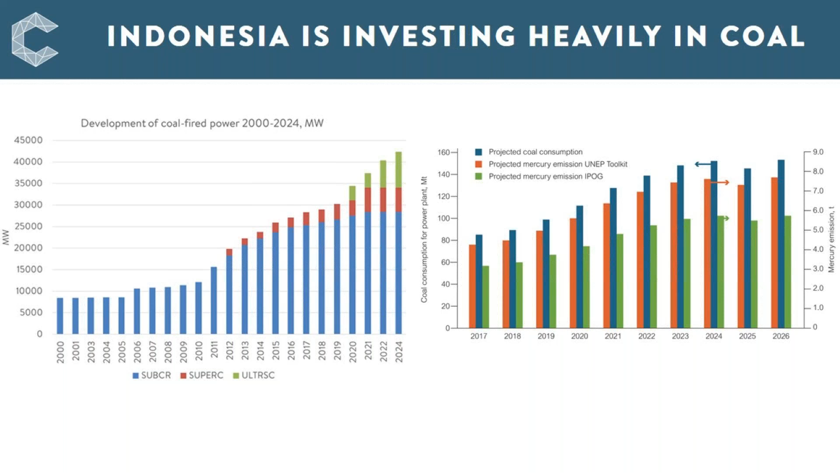Now, Indonesia has ratified the Minamata Convention. The Minamata Convention is set up by the United Nations to control and, where feasible, reduce emissions of mercury from all human activities. And coal is one of the major sources of mercury emissions to the atmosphere. Mercury causes developmental delay in infants and at high doses in adults too. It generally comes through eating fish and through the food chain. And so the accumulation of mercury in the environment is of great concern to most of the nations.

Indonesia, as I say, has ratified the Convention on Mercury, which requires it to take two actions with respect to emissions from the coal sector. First, on the left there, it must create and maintain a sectoral emission inventory, which means it must evaluate how much mercury is coming out of its coal sector and must keep an eye on how much that increases or decreases into the future.

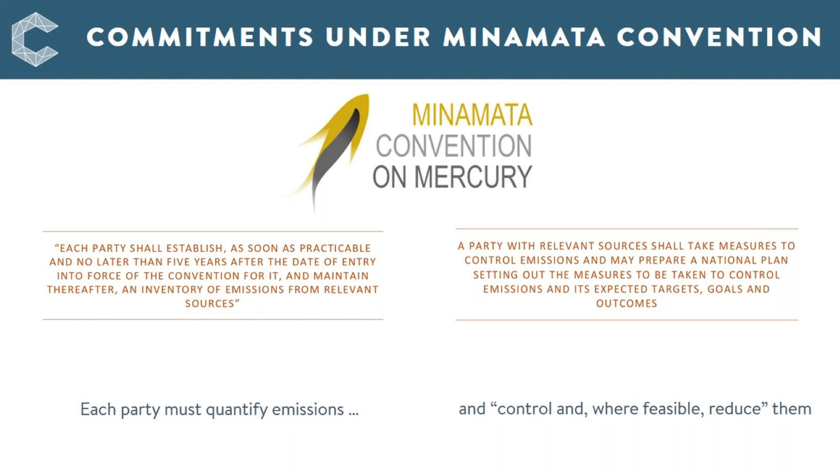And on the right there, it must take action to control and, where feasible, reduce mercury emissions by creating a national action plan that will focus on emissions from the sector. And that is what this project is about, helping Indonesia evaluate the mercury emissions and determining a national action plan to reduce those emissions.

Now, the Minamata Convention contains clear guidelines on how compliance should be achieved with different mercury emission sources. Within Article 8, there are requirements for actions specifically at coal plants, and the plants are divided by age, determined by the date in which the relevant party ratified the convention.

And that BEP is described, as I say, in this document, but it's not prescribed. The delegations themselves must determine what emission reduction techniques and technologies are most appropriate to their plants, and cost can be taken into account when considering what is best in each region.

Now, for Indonesia, as we saw in the previous slide, the majority of new plants being installed are HELE technologies, these high efficiency and low emissions. There are also more stringent emission limits for SOx and NOx in new plants. This means that most, if not all, of the new plants being built these days are going to have SOx and NOx control technologies in place. And these will result in co-benefit reduction of mercury in many cases.

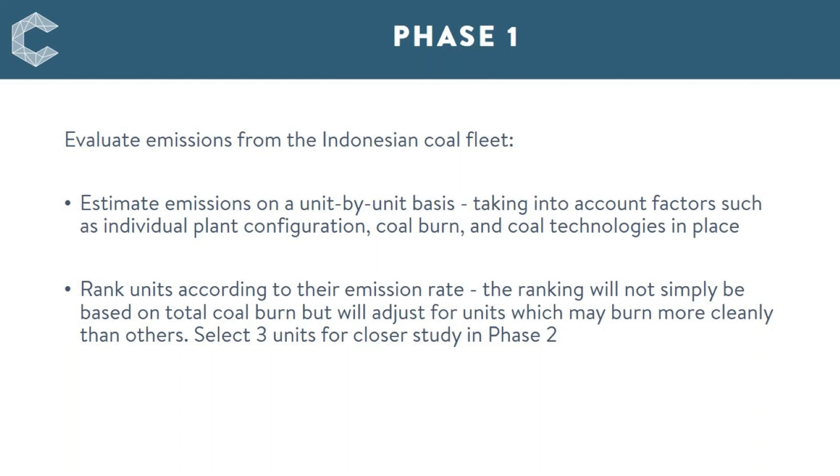So phase 1 is to evaluate emissions from the Indonesian fleet. For this, we have looked at over 111 units of plants over 100 megawatt in size. I think there are actually over 200 units in Indonesia, but only about 100 or so of those are over 100 megawatts. This means collating information of all those plants to crunch through the numbers to estimate mercury emissions for each individual unit. The ultimate aim is to then rank the plants in order to identify which plants emit the most mercury, as these plants would clearly be the most appropriate for the application of an emission reduction strategy under the National Action Plan. So in practice, we're creating the basis of an emission inventory, and from this we hope to develop a potential national action plan.

So first of all, the data collection, a lot of numbers collected in an extremely large data set. We, as I say, focused on the units over 100 megawatt in size, although the other smaller plants are listed in this data set, and that includes over 100 units.

We are focusing on the larger units as they are the plants that are more likely to be larger capacity, a larger utilisation rate, and therefore more likely to be contributing to the mercury emissions for the region. And also the larger plants are the ones where cost-effective emission strategies are more likely to be successful.

So we collected as much information as we could, COVID willing. We started this in January and it ran until July. The data set is huge. We have over 70 fields of information for each of the units, including the major factors listed here in this graph. We had actual coal chemistry for the coals and the coal blends being used at most of the plants.

As we gathered this information for a study we carried out in conjunction with the US Geological Survey on behalf of the UN Environment Programme in a project we did back in 2017. And we updated as much of that information as we could.

For the coal, we had obviously the calorific value, the ash value and so on, but we also had the mercury, sulfur and chlorine content, which affects the chemistry and the behaviour of mercury in the plant and is very important with determining how much leaves the stack and how much ends up in the ash.

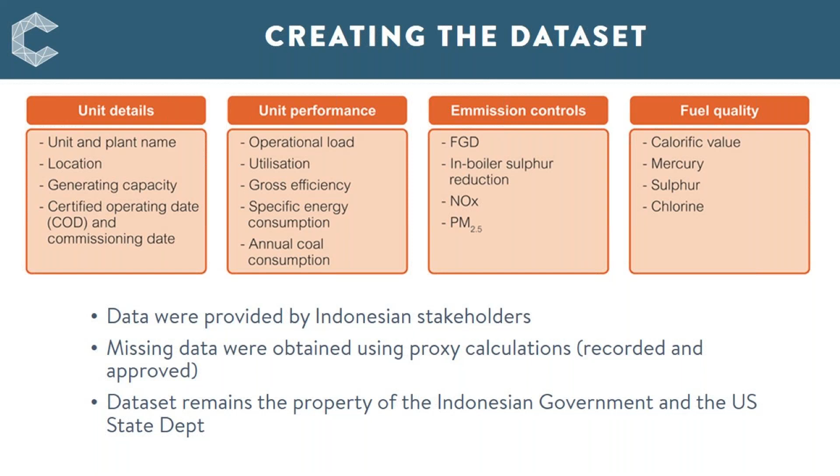The data set, as I say, is huge. We're not going to be sharing it. It is proprietary, some of the information, and it remains the property of the Indonesian government and the US Department of State. However, as we move into phase 2 and 3 of this project, if anyone specifically needs more information on the plants we are studying, we will hopefully get permission to release more information as it becomes necessary.

Okay, so moving on to data analysis. It's important to understand the major differences between this study and most other sectoral emission studies. The majority of emission inventories you will see out there are top-down.

That means you're taking an emission factor for a general national coal in most cases, combining it with a retention factor that's a reflection of how much mercury is retained within the ash or the gypsum from the plant and doesn't come out of the stack, and then using an activity value such as the total amount of coal burned to produce an estimate of mercury emissions from the whole fleet. And this is the way the UNEP toolkit defines how to do it under the Minamata Convention.

It provides a generic emission factor, a table of those, and if you look up that table, this is the emission factor you will get for Indonesia. It provides a generic retention factor based on ESP only on most of the plants. And then of course you multiply that by the amount of coal burned in Indonesia, and that gives you your mercury emissions from the fleet.

In 2017, we carried out a project, as I say, on behalf of the UN Environment Programme, in which we went in and we analysed the coal so that we got an emission factor that was more accurate for the Indonesian fleet. We also used our IPOG model, which I'll talk about in a minute, to predict a more accurate retention factor for the mercury within the plant.

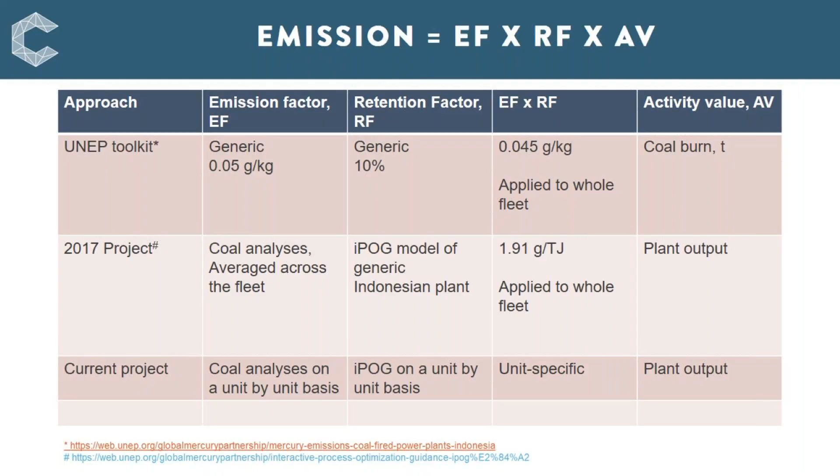Now, this is the IPOG calculation tool, which I have mentioned in the past. There is a webinar on this available through our website and through the Global Mercury Partnership website of the UN Environment Programme, and I can send you that link. Oh no, it's actually down the bottom there.

If you go to that site, you can download this little Excel tool. Your computer won't like it. It is an exe file, so beware, but I can promise you, once you've downloaded it, it is very useful. It comes with a very important user manual so that you understand what data is being used and how best to use it.

And what this is, is a very user-friendly interface which lets you type in your coal chemistry as much as you know. If you have a lot of detail, you can put that in specifically. If not, you can choose a generic high sulfur coal. You put in, it's almost like a Lego brick build, an indication of your plant configuration.

So you'll choose the boiler size and configuration. You can put in low NOx burners or not. You can choose an ESP or a baghouse. An FGD can be slotted in there. It takes less than 3 minutes for most plants to put this information in. You press the go button, and in the top right there, it will give you an estimate of mercury emissions from your plant. Obviously, it's science, it's not magic.

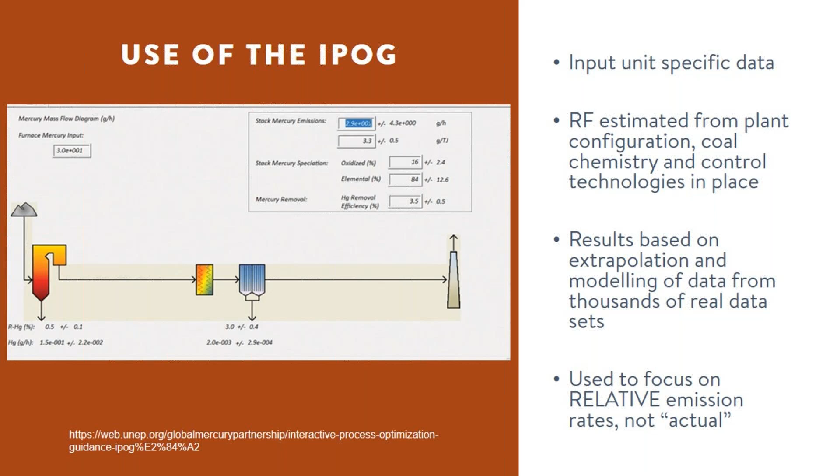It's based on data collected through the information collection request of the US EPA several years ago, and it's been augmented with data that we've collected from Asia, Africa, and Russia. So there's a lot of numbers behind there, over 3,000 mass balances from actual plants. However, obviously, it still remains a best guess, and we would not recommend that this is used for defining the control strategy or the emissions from any plant. However, it's a very useful tool when you don't have any access to the plant in question.

Okay, so we number crunched. We have the coal characteristics from the study we did with the USGS. So we have the coal emission factor specifically for each unit. We have a plant-specific retention factor that we've estimated using the IPOG tool, and of course we have the plant utilization rate that we got from the Indonesian stakeholders, how much it's running, how much power it's producing, and so on. And so there are two ways of ranking the information we get from that.

We can look at current emissions, which are interesting, but they provide a very uninformed snapshot. Plant A and Plant B may be emitting the same amount of mercury per year, but if Plant A is going to close in 2 years and Plant B is going to run for another 30, then obviously Plant B is more significant with respect to any reduction strategy. What is more useful is the emission intensity. That's the amount of mercury emitted per gigawatt hour of electricity produced. And that's going to identify which plants are burning more cleanly than others. And that's what we produced.

And then we combined this emission intensity with the expected remaining lifetime of the plant to let us know which plant will emit the most mercury before it closes. Now for this, we assumed a 40-year life plan for all the plants. However, this is just one field. If we want to change that to say a 25-year time plan, it's a simple change of the calculation within the data set. And this is something the Indonesian stakeholders may want to play with in future, determining the effect of closing down higher emitting plants earlier than others.

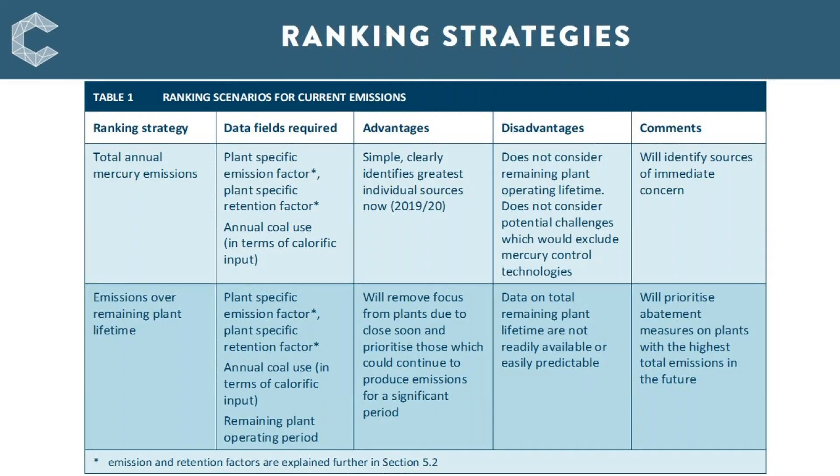So finally, let's get on to some actual results. I'll just let you look at this for a couple of seconds while I have a glass of water.

This is our fleet emission intensity. So what we have here is the unit size of the plants we studied, ranging from 100 megawatts to over 800 megawatts, and their predicted emission intensity, that is the amount of grams of mercury they are predicted to emit for every gigawatt hour of power produced.

Obviously, your eyes are being drawn to these two outliers on the left here, where either the data is very wrong or these plants are burning in a very unclean manner. And I'll talk about one of those later. However, if we focus at most of the well-behaved plants that are remaining within our normal zone of operation, we can see that for the most part, the emission intensity is not directly related to plant size. We have clean burning and not so clean burning plants of all sizes.

And even within this sort of well-behaved sector of the data set, it's clear that some plants are emitting almost an order of magnitude more mercury per gigawatt hour than others. And clearly those plants should be cleaned up or used less than the others.

This average line along there is not the average of the Indonesian fleet, although it looks like it is. This is actually the average emission intensity of US plants reported in the early 2000s. I think it's dated from 2004. So this is showing how cleanly the US fleet was burning before MATS, the mercury and air toxics standards ruling, and before the application of mercury controls across the US fleet.

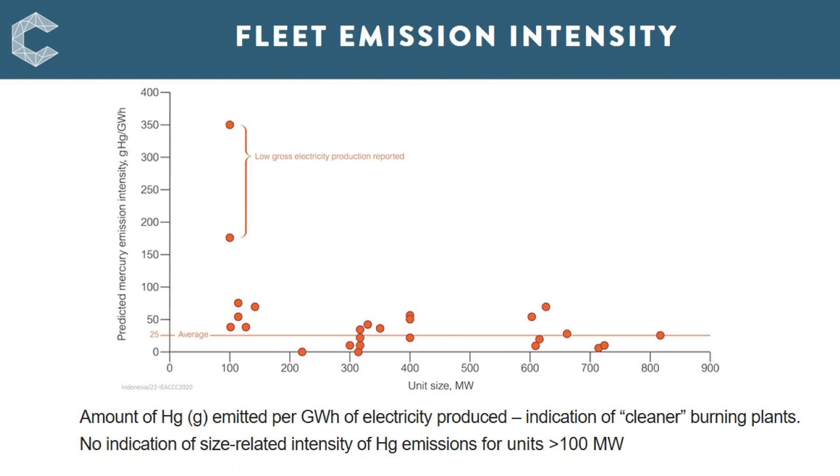It's just included to show that the Indonesian fleet has pretty similar mercury emission intensities to the US fleet. So they're not burning any cleaner or dirtier than any other plants in any other fleet. However, what is important is that some units genuinely seem to be emitting an order of magnitude more mercury per gigawatt hour than others, and that is a powerful piece of information.

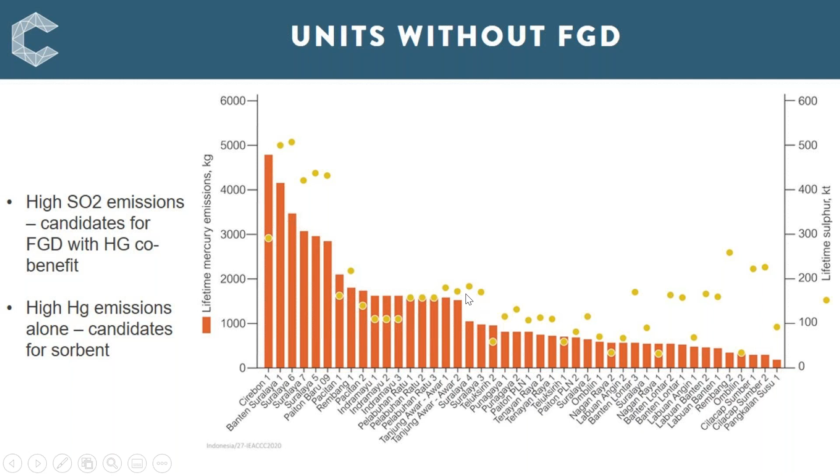For those of us that know their FGD systems, we would expect mercury to be effectively controlled in a high-performing, normal-performing FGD system. Mercury is usually captured because in its oxidized form, it's quite soluble. However, we have to remember that we haven't measured this data. This is modeled data based on the coal chemistry. And these plants are predicted to emit a high majority of elemental mercury, which is not easily captured in an FGD system. And so predicted, this elemental mercury will pass through this FGD unscathed. Now, before Indonesian stakeholders take any action against these FGD units, obviously we would insist that they did actual mercury monitoring to ensure that our model is correct.

However, if it is the case, then it's very interesting that the mercury is not being effectively captured in this FGD. And I'm sure as a lot of you out there know, a simple addition of perhaps some oxidant or some chlorine or a blending of the coals, there's ways of easily enhancing the mercury capture in an FGD system that could be very cost effective with these plants.

Okay, so as I say, for phase 3, we want to select 3 plants for closer study. We want to choose plants which obviously have high mercury emissions, but we also want them to be representative of the Indonesian fleet. If we simply choose the top three plants, then we're going to end up with two Suralayas, which are identical, and a Cirebon, which is also very similar. We would rather choose plants which are distinct and different, so that when we cut and paste any successful reduction strategies, we have a higher hit across the entire Indonesian coal fleet.

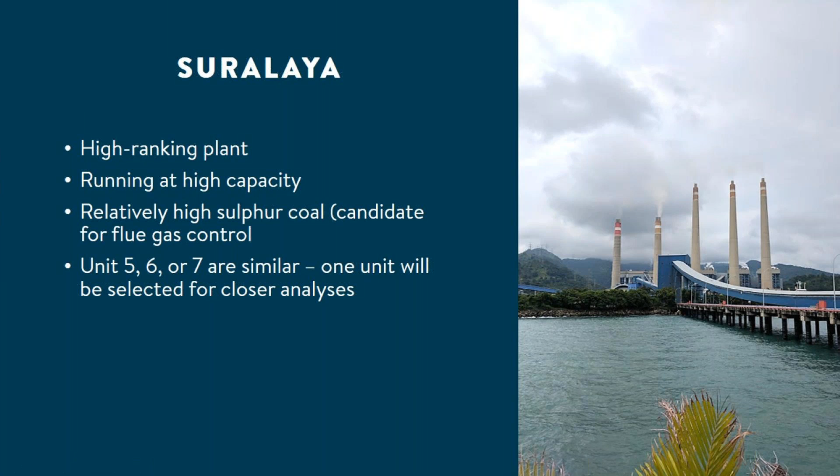We're hoping to work with unit 5, 6 or 7, but the units are very similar, so it won't really matter which one we choose. It will be up to the plant which one they're happiest for us to work with. We also wanted to choose that Paiton unit 2, the one with the seawater FGD system that is emitting as much mercury as a plant without FGD, which of course is surprising. Obviously, we want to go in and verify that that estimate is right. And if it is, we want to look at potentially enhancing the mercury capture in that system.

Now, seawater FGD systems are becoming more common in places such as Indonesia, which have access to significant amounts of coastline. Indonesia, as I said, is an island nation. There's an awful lot of sea to be used in a seawater FGD system. Seawater FGD systems are ideal for sulfur capture, as they use the natural chemical characteristics of seawater to capture the sulfur emissions, and the seawater can be released back out into the environment.

This is more of a concern when we're looking at mercury, because some of these plants are in beautiful coastal locations such as Bali, and we want to ensure that if we do come up with a project to reduce mercury emissions into the air, we don't simply end up increasing the mercury emissions into sensitive aquatic ecosystems and beautiful coastal beaches.

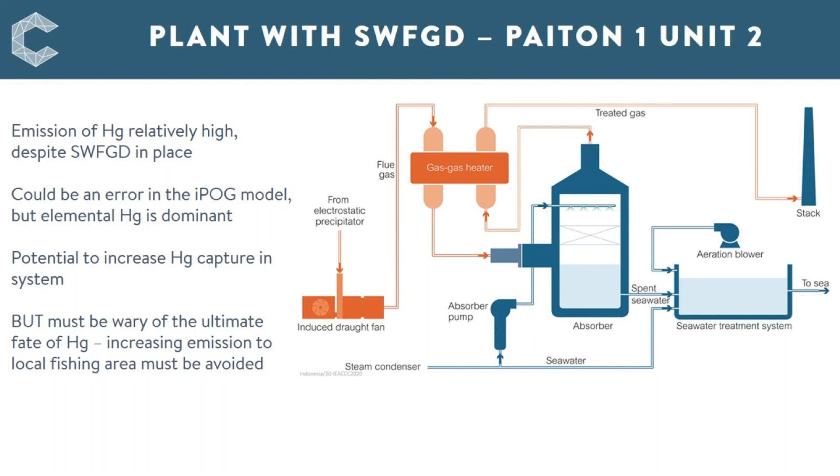And finally, our third plant is the one that everybody's eyebrows raised at earlier. That is the unit on the far left there, the top high value, which is emitting orders of magnitude more mercury than any of the other plants in the fleet. It didn't appear in that ranking graph I showed you because it is small, it's below 100 megawatts, and because it's imminently due for closure, so its remaining lifetime is 0. However, obviously that plant is not running particularly well. It's using mine-mouth coal, and it's running very inefficiently.

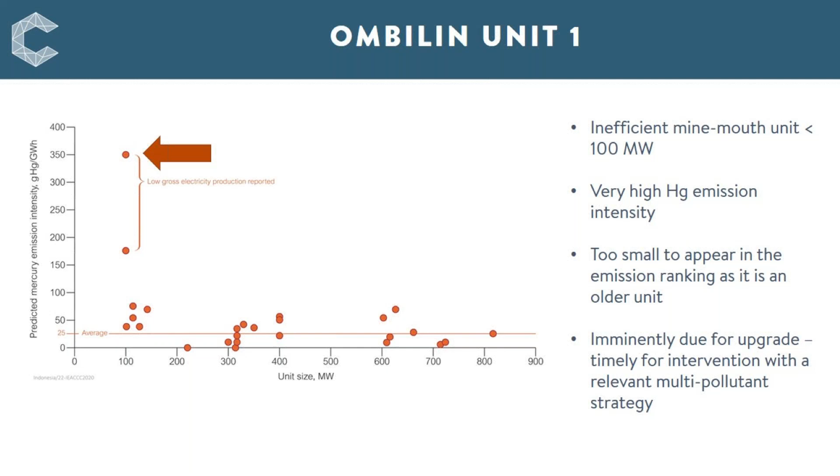What is exciting and interesting about this plant is it's currently being closed and is due for upgrade by the utility that operates it. And so this works in our favour, as it potentially gives us access to a plant as it goes through an upgrade and modification process. Hopefully we'll be able to get our hands dirty and ensure that any changes made to this unit will improve its efficiency in operation, but will also take mercury into account in any of the modifications being applied.

So moving on to call for proposals and how you can get involved. We have a March 2021 event that Benedicta will mention in a moment, and which will be on our website very soon, that you can register for. And at that, we'll be providing more details of the study. We'll be hearing from our Indonesian stakeholders, the Ministry of the Environment and Energy and Mineral Resources. And we will be looking to describe in more detail the 3 plants that we propose to work with.

And we will be asking for you to work with us to come up with suggestions and proposals for techniques, technologies, strategies and policies, anything that can be put into a national action plan to reduce mercury emissions from this existing group of plants. We will then compile a catalogue of all the proposals and present this to the Indonesian government to inform their national action plan.

And I can confirm that the Indonesian government, the stakeholders we're working with at the moment, have agreed to use our information and our proposals to inform the National Sectoral Action Plan. They're more than happy to have experts such as you and I guide them on how best they can comply with the Minamata Convention, which is very exciting.

So my major conclusions are that it's exciting to look at the mercury emission intensity of each plant on a unit-by-unit basis, because it does give us so much information about which plants are of most concern, and it allows us to focus on the plants which are higher emitters and those which we know are going to be running for a long period of time or at high capacity.

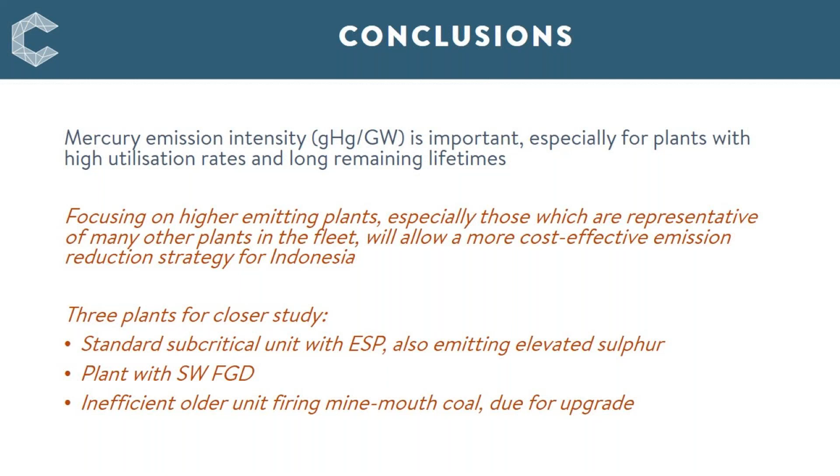And as I say, we've chosen 3 plants for closer studies, confirming which ones they are, but we know there's going to be a standard subcritical unit with an ESP, probably Suralaya, a plant with seawater FGD, probably Paiton, and this Ombilin plant on Sumatra, which is due for upgrade. So we will disseminate this information after the online event in a call for proposals.

We are then hoping to have an actual MEC. As anyone that knows the Clean Coal Centre knows, we have an annual workshop called MEC, Mercury and Multi-Pollutant Emissions from Coal, which moves around the world. Obviously it didn't happen last year due to COVID. It would be great to think we could have it in Jakarta late this year or early next year, and that's what we're hoping to do.

And should that be possible, we will build in site visits to the selected units to let you get out there, look at these plants and come up with site-specific proposals for reduction strategies, which we'll include. If COVID doesn't let us do that, we'll come up with some other online way of doing it, but fingers crossed for getting us out there and getting our boots dirty on the ground.

Now, phase 3 of this project, we're looking to find funding. Now, there is funding within this grant that we're using to find funding. There's not funding for a project, but there's funding to find funding for a project, if that makes sense. We will be reaching out to funding sources to see if we can come up with money for a demonstration project or for some other means of coming up with a mercury reduction strategy that we can test in practice.

However, it's important to remember that Indonesia has actually ratified the Minamata Convention. Therefore, it has until 2027 to come up with its national action plan and to move things into action. And so even without external funding, some form of action is compulsory within Indonesia anyway. We are providing the guidance to them, and so I'll be very surprised if we don't see some of our ideas moving to fruition within the next 5-6 years.

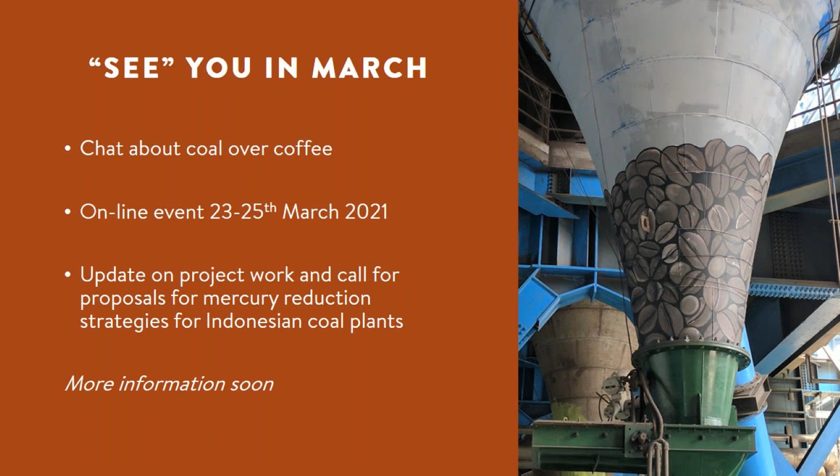Kind of cute. We will have this event online on the 23rd, 24th and 25th of March. It will be 2 or 3 hours a day, presentations from us and the Indonesian stakeholders, and a chance for some roundtable discussions and questions. And as I say, at that time, we'll give you the update on all the project work and we'll provide more details on the call for proposals. So this is not the call for proposals. The call for proposals will come in March and more information will come at the online event.

Finally, a quick mention of our knowledge partners. If anyone's intrigued at what we're doing, it's not just a study in Indonesia, we're also doing work in India, lots of other projects. So we've created a networking group known as our knowledge partners. It's an informal association which just facilitates the sharing of information and results on how to reduce the environmental impact of coal and to enhance energy security in many regions where coal is readily available.